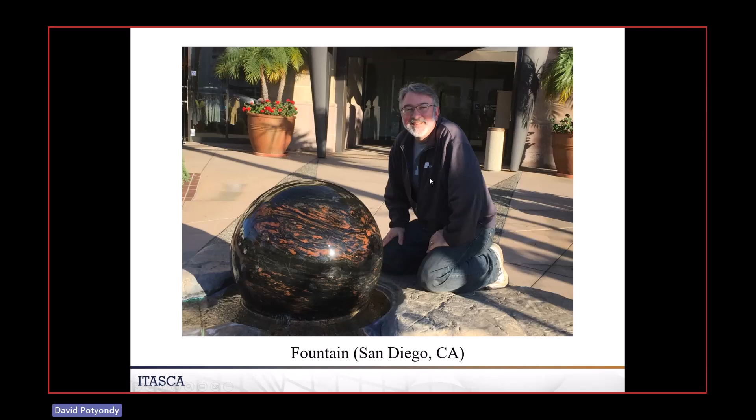So here we go. San Diego, California. There you go. There's my ITASCA sweatshirt I got on there. Sphere. Okay. Check this out.

Granular material. We're going to do something where we want to model what's called GeoGrid, and I'll tell you all about what this is. But basically, this is this hard plastic stuff, and you put that into a granular system. And what it does is it strengthens it and it increases its stiffness. And this is what we want to have when we build a road.

So what's a GeoGrid? There's my pocket knife. There's a reference scale. Okay, this stuff is plastic. It's extremely stiff. Comes in different sizes with different size apertures. This is granular material. This is actually the type of material that they put as what's called a base layer of a roadway. Let's see if I don't have the picture here.

When you build a road, what do you do? You make a big ditch that might be, I don't know, 4 or 5 meters deep. And then you put soil in there and you compact it. And then you put aggregate in there. If you mix these two together, that's a typical type of aggregate that would be used in Minnesota roadways. It's called ballast. And that might be a meter or more in thickness. And you smash that down with a compactor. And then you put your asphalt. The asphalt might be 6 to 12 inches thick.

The ballast is hopefully stiff because the asphalt, the more it flexes, eventually starts little fatigue cracks to grow out of the surface. Those fatigue cracks are bad because water gets in and it's a feedback mechanism, and then eventually your road starts to crack. So what you want is that ballast material, ideally, to be infinitely stiff.

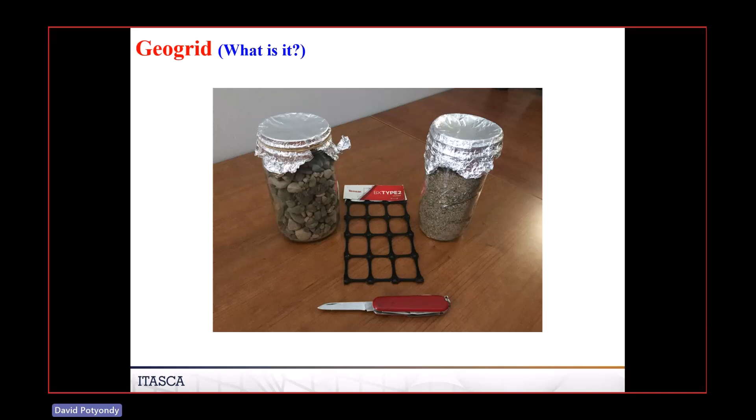And so this was some research work over many years that involved field scale, lab scale, and numerical modeling to gain a better understanding of how the GeoGrid affects the stiffness of a system. Again, the high level picture is we developed the ability to model unsaturated granular material. That means there's some water in there, and the water makes it stronger, and we'll talk about how we did that. We could model that material with GeoGrid.

We could perform triaxial tests on it, and based on the triaxial tests, we can come back with what they call resilient modulus. It's basically the slope of that curve. We could get strengths from triaxial tests. We did the dynamic cone penetrometer tests and lightweight deflectometer tests as well. If you don't know what they are, don't worry, I'll talk about that later. Again, do we have the mechanisms?

With this model, what are the things you can change? What are the things you can quantify the effects of? So we could change the geometry of this. Some grids are square, some grids have triangular openings. What is the effect of that? Some grids are really stiff, some are not as stiff. What about the ballast? We could change the shape, the size distribution, the modulus of the ballast itself. Packing process.

The triaxial response of this system is highly dependent upon the initial porosity, and you can pack these things in different ways to get different initial porosities. Think of doing this with real dry sand in a laboratory with a coffee cup. If you pour the sand in very slowly and then do a triaxial test on it, and then in the next test you pour the sand in but pound it against the table a few times, now it packs tighter. It's less porous. Then you do a triaxial test, you're going to get a very different response.

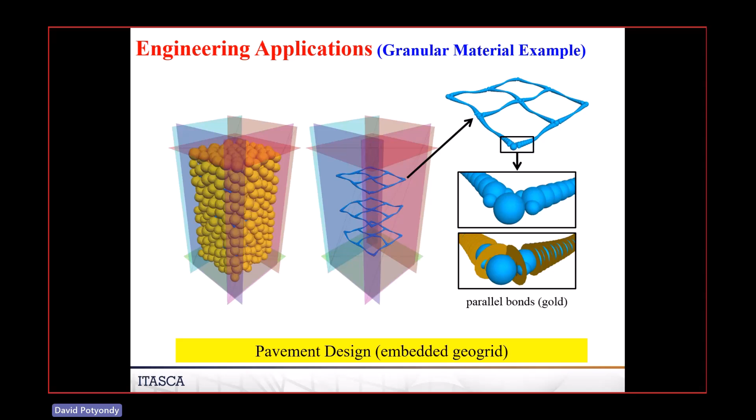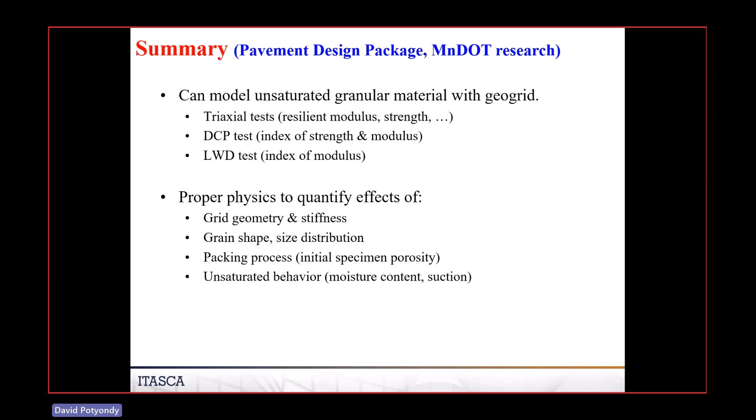So we had a way when we construct this of controlling the initial porosity, and what effect does that have on the strength? What we find is the more porous, the weaker it is, and the less stiff it is. And then this unsaturated part: what sort of moisture content, what sort of suction are we getting, and what effect does that have? So those are the things that we were able to quantify with the model.

Here's an example, putting in that geogrid, rolling it in. There's an example of the triaxial, they call it, geogrid. It's got 3 things. This one has 4.

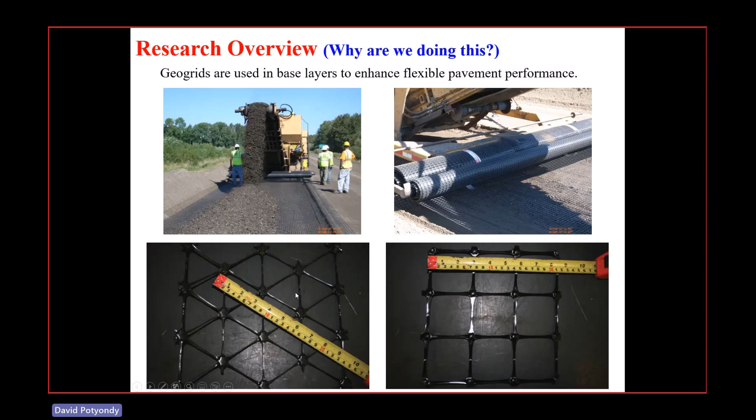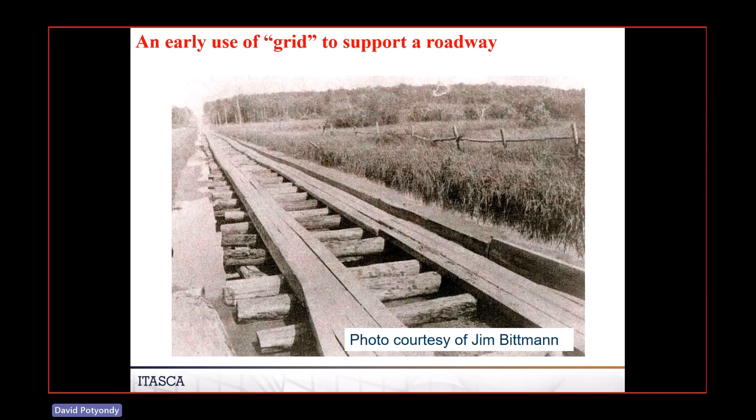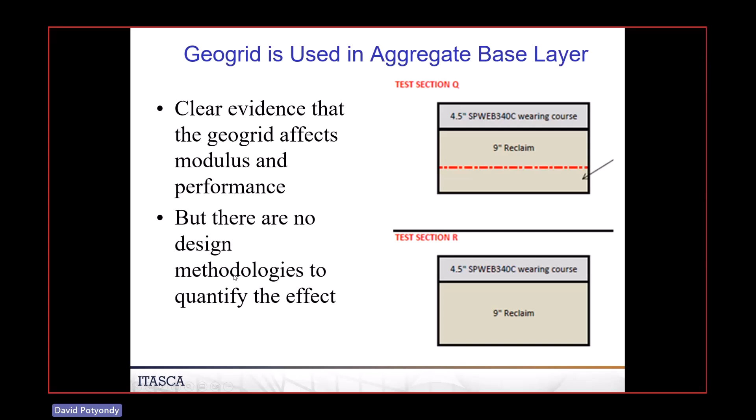Again, this is a bad slide. This is basically talking about that people really do believe that the geogrid makes it better, but the current design methodologies do not account for that. So the idea was to see if we could better understand geogrid so that we could propose changes to the design procedures so that people could take advantage of it when they do their design.

And again, this is saying here 2 inches. That's what it used to be. If you have geogrid, it doesn't matter what shape it is, what stiffness, doesn't matter. Put in geogrid in the middle of the ballast, you can take off 2 inches. That's kind of ridiculous. That's so conservative.

What did they do when they design things in Minnesota? It's crazy nowadays. They have one program. It's called MnPAVE, Minnesota Pavement Design. They have this program. That's what you have to use when you design a roadway to figure out the ballast, the thickness of the layers, the thickness of the asphalt. This program is crazy because it incorporates huge amounts of information.

You say, I'm going to design a road in northern Minnesota, which is by Lake Itasca, right? I said it's 150 miles north on the Mississippi River. It takes into account the fact that there's in general more precipitation and colder winters there than there is in Minneapolis. And that has an effect then on the life of the pavement. So all this stuff is embedded in this program.

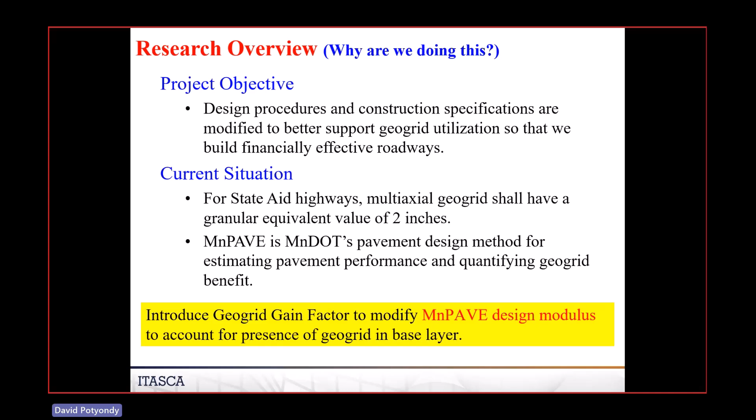So the end result of all this research was to provide new buttons, if you will, in MnPAVE, where you could say, I will have this type of geogrid and it has these properties, and therefore MnPAVE will tell me what sort of thickness I can do. Okay. And so the way we did that was to come up with how does grid affect the modulus of the overall ballast. And the modulus is one of the most important things.

So these are the 2 things that they compute with this infinite half space model. And what you have to do is you have to choose these things when you do a design such that the life you're going to get is greater than 20 years. So in Minnesota, the roads are built to last for 20 years.

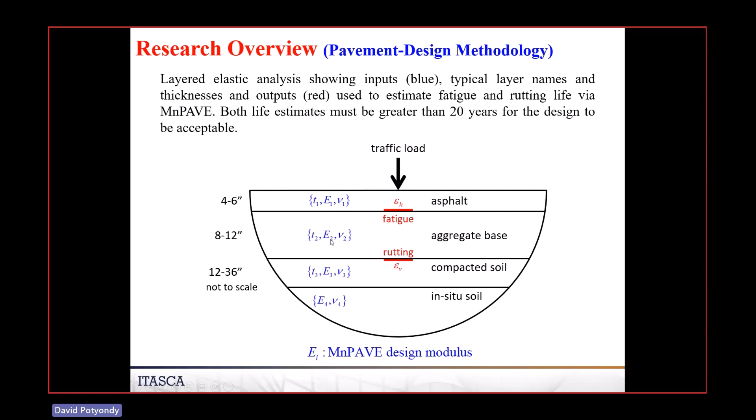The idea being that after you've had the road in operation for a few tens of thousands of cycles, it basically just behaves like this. And so that's the important modulus that you want to have. And so we developed the ability to do these models and to do this loading and to compute that slope.